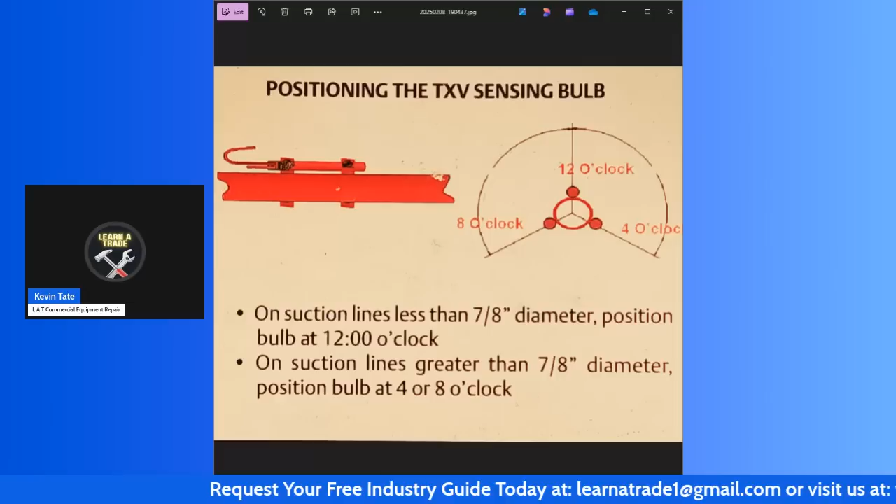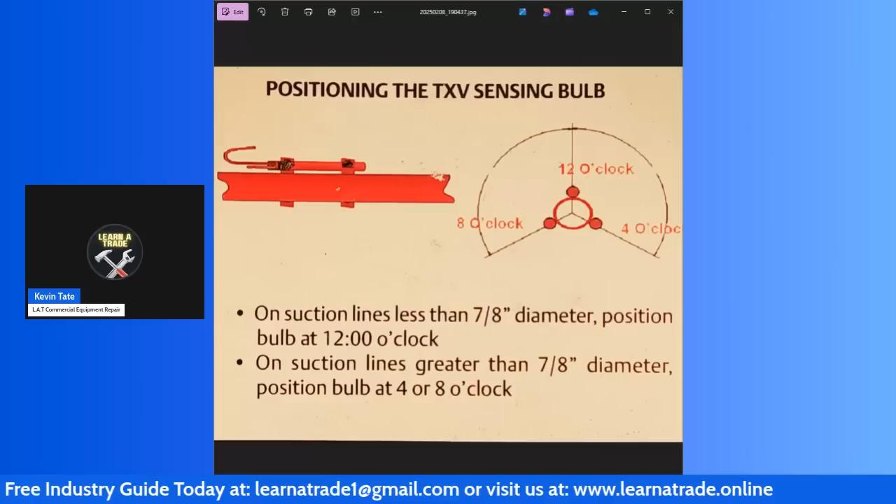The placement of the remote sensing bulb of the TXV onto the suction line is critical to proper TXV performance. The important points to follow are this: clean the suction line near the outlet of the evaporator. The entire length of the sensing bulb must be in contact with the cleaned portion of the suction line.

The sensing bulb should be placed several inches upstream of the external equalizer connection. The sensing bulb should be attached at 12 o'clock on any suction line of 7/8 inch diameter or smaller. On lines larger than 7/8 inch diameter, the bulb should be placed at either 4 o'clock or 8 o'clock. The bulb should never be placed at 6 o'clock on that line.

Always insulate the sensing bulb after installation. And lastly, a sensing bulb can be installed on a vertical suction line if necessary, but never place the bulb downstream of a trap. Bulb placement before a trap, upstream, is recommended.

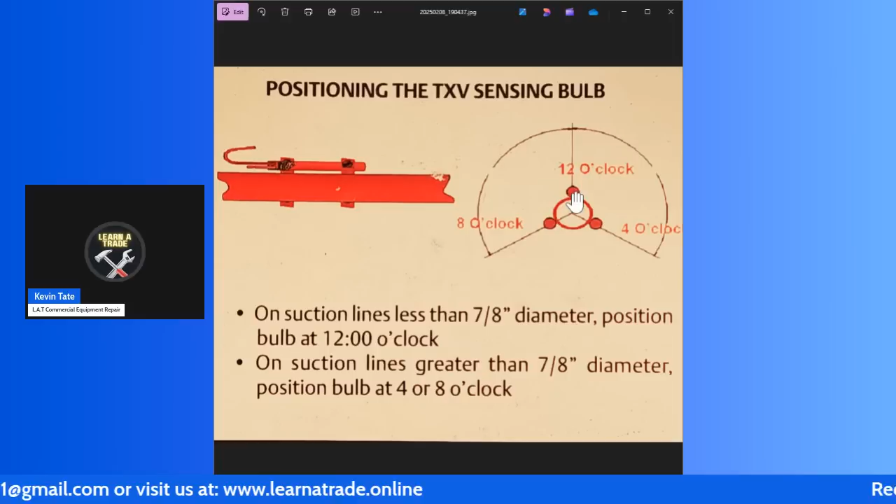And in the image that you're seeing, this is just to show you the positioning on that suction line, the positioning of your bulb on your suction line. So you're looking down at the bulb, and you're looking at either placing your bulb at 12 o'clock, which is here, 4 o'clock, which is here, or 8 o'clock.

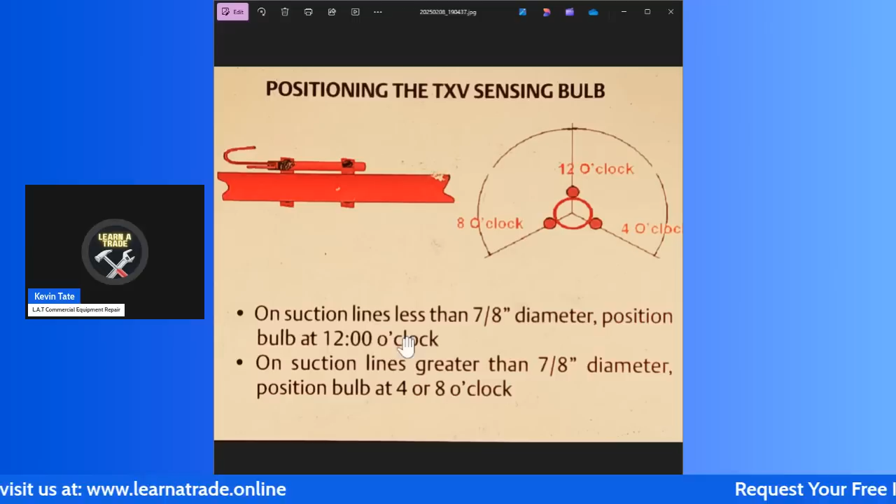Those are the three positions. You never want to place it at 6 o'clock. On suction lines, just to remind you, on suction lines less than 7/8 inch diameter, position bulb at 12 o'clock. On suction lines greater than 7/8 inch diameter, position bulb at 4 o'clock or 8 o'clock.

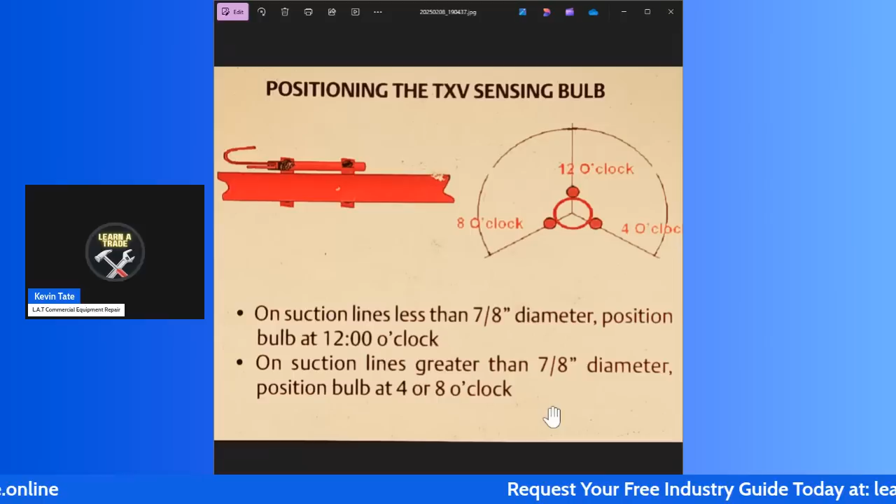So this is just something that hopefully will be helpful to you all out there in the HVAC or HVACR industry, out there in the field. Hopefully this is helpful to you.